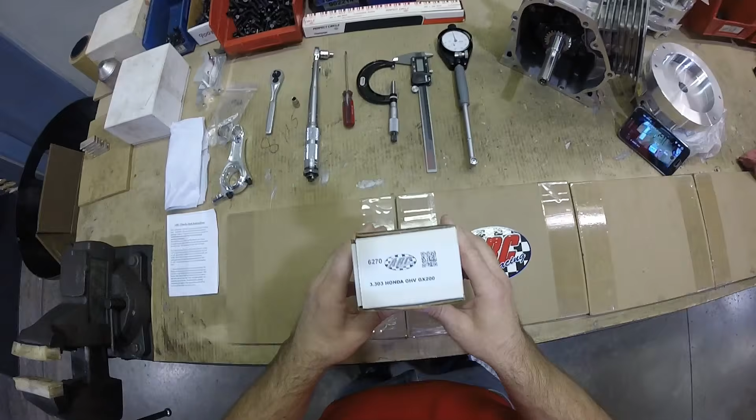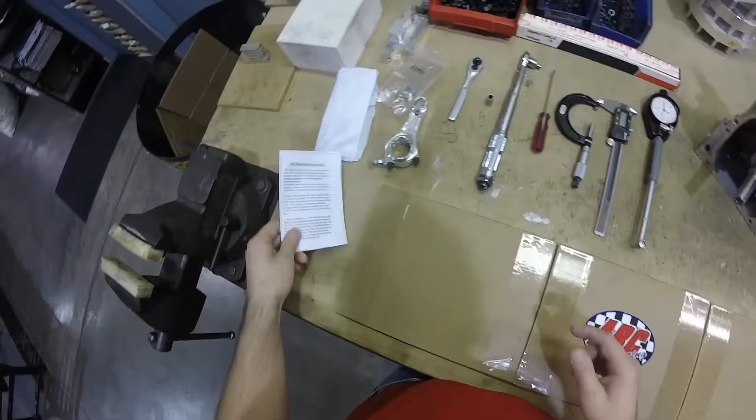When you receive your billet connecting rod, it'll come in this well labeled box telling you the length of the rod, the engine it's for, and the part number. Inside the box, of course, you'll find the bearing inserts, the connecting rod with the bolts already installed, and these instructions. Now the instructions will tell you anything and everything you need to know to properly install your billet connecting

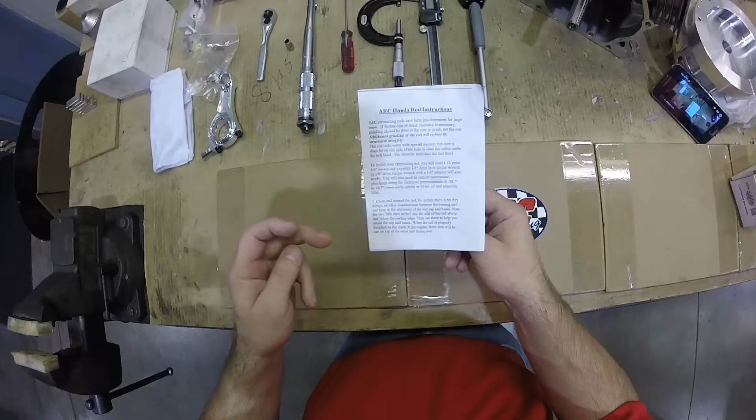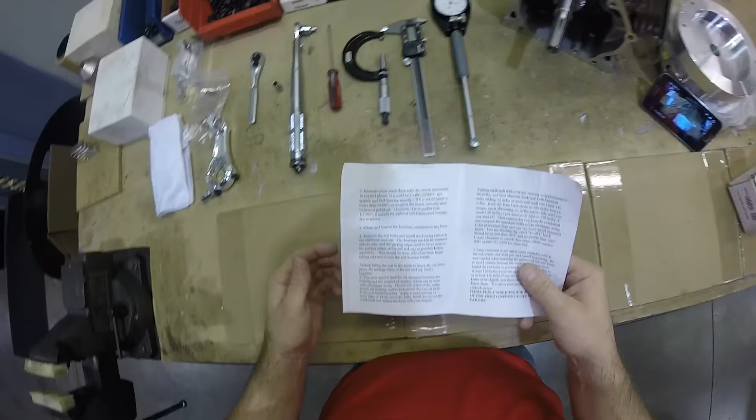rod into your engine. Everything from the tools you'll need, cleaning and inspecting the rod when you get it, installing the bearings, proper bolt torque, the poundage, the proper lube to use on them. It gives you measurements to check your oil clearances with if you're using inside and outside micrometers. It also has a brief description on how to check your oil clearances with plastigage.

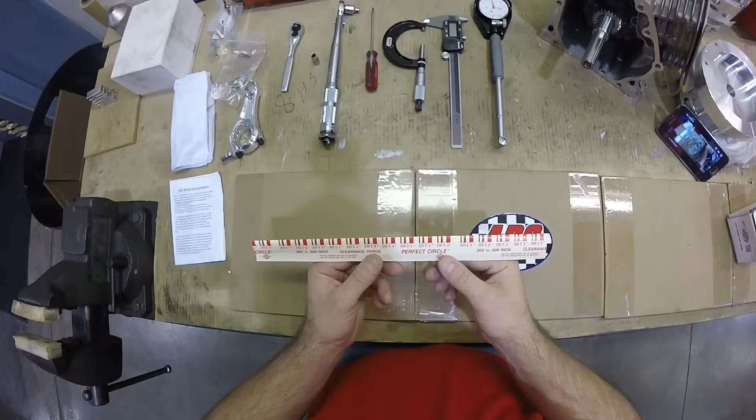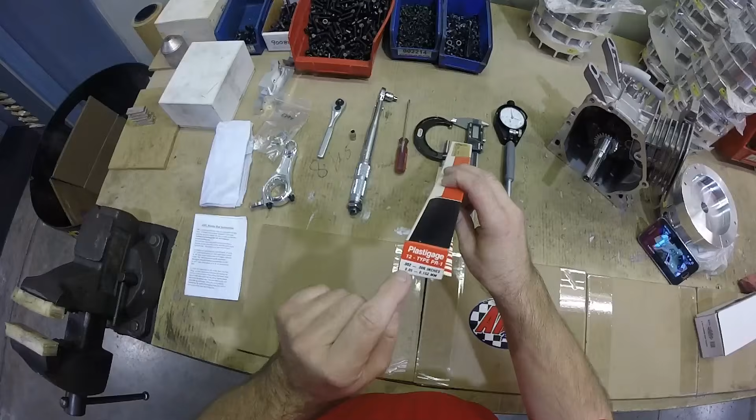Now plastigage is what a lot of people use to check clearances with. This is available at most any auto parts store. If they don't have it in stock, they can order it for you. But you need to make sure that you get the measurement sizes from at least 2 to 6 thousandths of an inch, because the measurements that you're looking to achieve here is between 2.5 and 3.5 thousandths of an inch.

The other tools you'll need that might be kind of hard to find is the 12-point quarter-inch socket that we use to tighten the bolts with. Again, these can be found at any auto parts store. I found this one at Lowe's. I got them at Home Depot. Most any place has got them or can get them.

You'll need a quarter-inch torque wrench. 3/8 is fine to use, which is what I use. You can get these little adapters at any auto parts store also, but if you use a 3/8 torque wrench, make sure that it is in inch pounds, not in foot pounds.

A 3/8 torque wrench is okay to use. The quarter-inch specific torque wrench is much more accurate, and it's also more compact to be able to get up into the engine to tighten your bolts. And you got a lot of tight areas right there, so you need something compact. But I've used this one on every engine we built, and I have zero problems tightening down bolts.

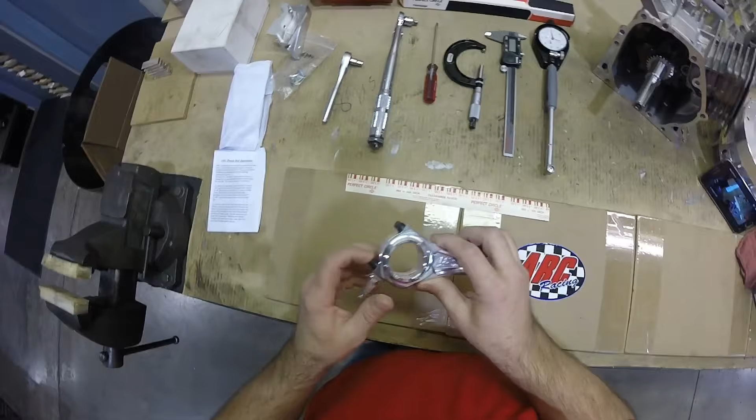Okay, what I'm going to show you now is how to install the bearings in the connecting rod and to check your oil clearance between the rod and the crank by using the plastigage. Now, as I told you earlier, these rod bolts were already installed when you got the connecting rod, and they're torqued to 150 inch-pounds. And they're done so for a reason.

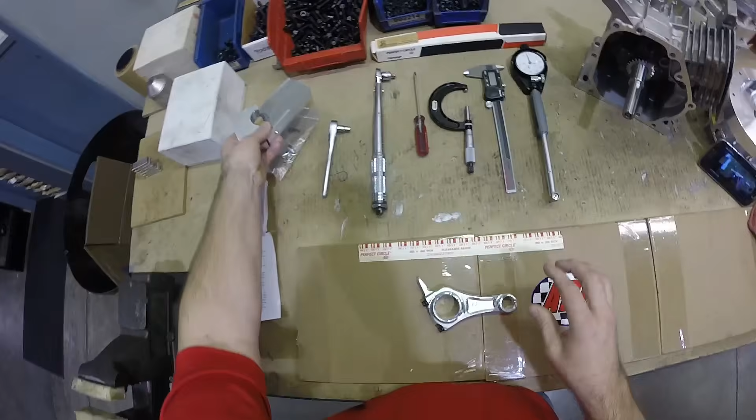It's because this connecting rod is made in two different parts. You have the cap and you have the beam. We make the caps and then we make the beams. Once the machining process is so far along on both of the products, they are mated together, the bolts are installed and torqued to 150 inch-pounds, and then they finish the machining process on the rod.

What that does is it mates this cap to this rod, meaning you cannot take the cap off of this 6270 connecting rod and install it on another 6270 connecting rod. They may look like they'll fit, they may feel like they'll fit, but more than likely what's going to happen is the bearings are not going to line up properly, and it's going to cause rod failure.

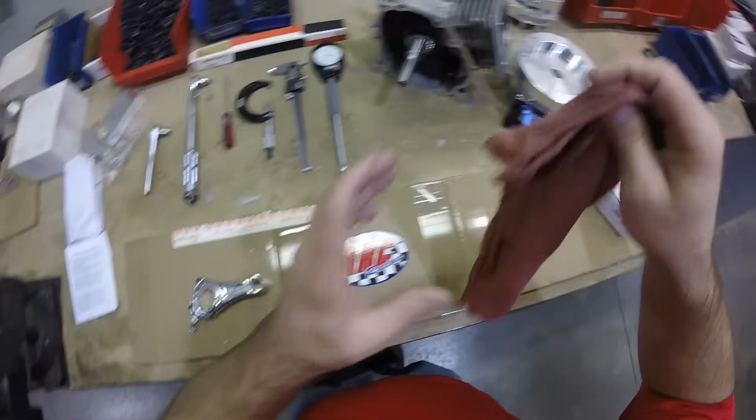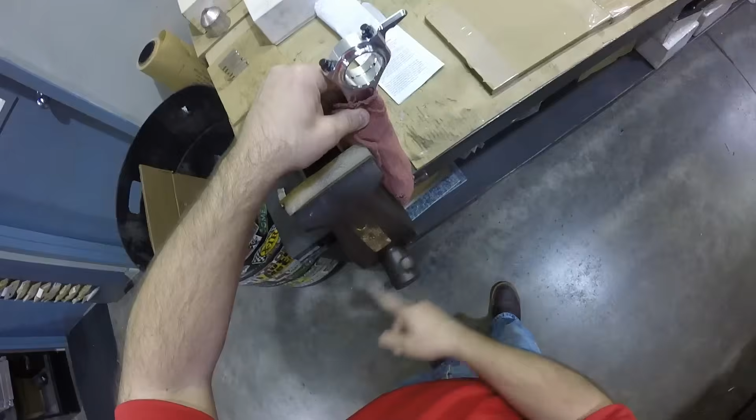Now, to take these bolts out, like I said, they're 150 inch-pounds. Easy way to do it, simple shop rag. Wrap it around the wrist pin area of the rod and install it in a vise. If you notice here, I do have soft jaws on this vise.

It is perfectly fine to use the metal jaw clamps on this rod. That's why you wrap the rag around it, to prevent any damage. I mean, you're not trying to squeeze it and change its shape. You're just trying to hold it in place to loosen the bolts. Take your 12-point quarter-inch socket and pop them loose.

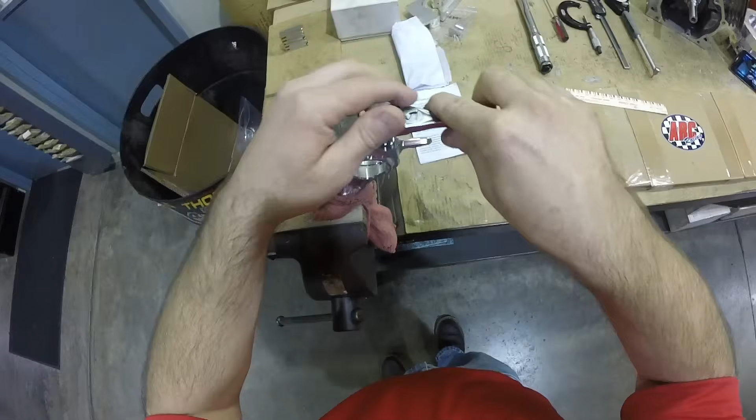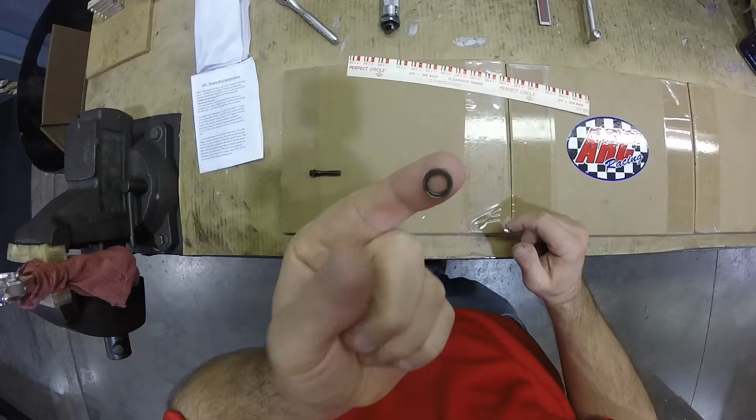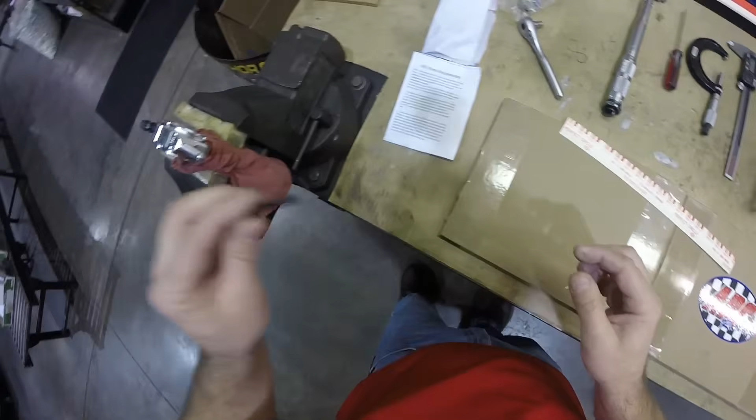Now, one thing to remember when removing these bolts is they do have a washer on them, and the washer is indexed, meaning it can only go one direction. If you look at it, one side has a bevel, the other side is flat. The beveled side always goes toward the rod bolt. The flat side always goes toward the connecting rod. That's important to remember when you go to reinstall the cap, is to make sure that the washers are the correct way.

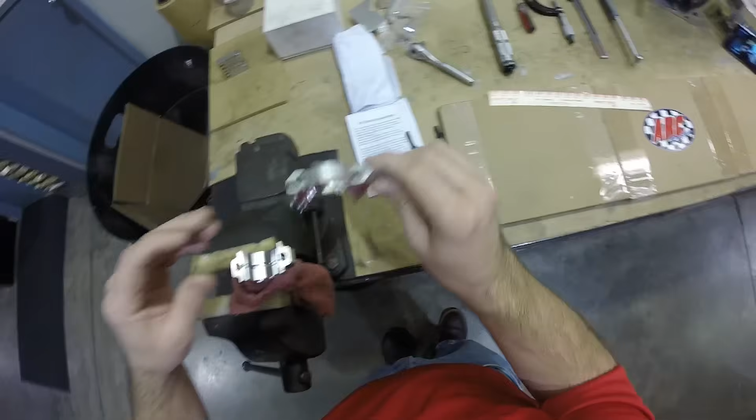Now, at this point, you can take the connecting rod and clean it. You can use warm soapy water, get down in all the holes really good, scrub it really good, and use compressed air to dry it. The compressed air will blow out any debris that may be caught up in the rod from shipping or handling, or whatever reason it may be in there.

These here are your rod bearings. Now, they're not indexed top or bottom. It doesn't matter which one goes where. One thing you may notice on these bearings, if you see right there, some of it's shiny, then it gets kind of dull. That's nothing more than the coating from where we packaged up the bearing. You see that fits a thumb perfectly right there. That's where we touch it, and it turns dark. It harms nothing. It will cause nothing. You can take a rag most of the time and kind of buff it out.

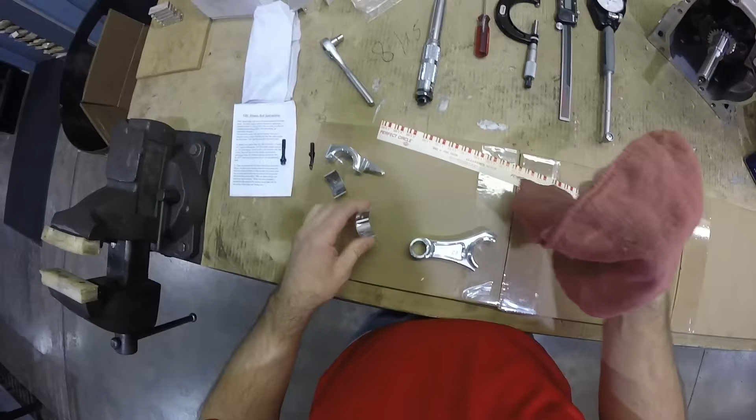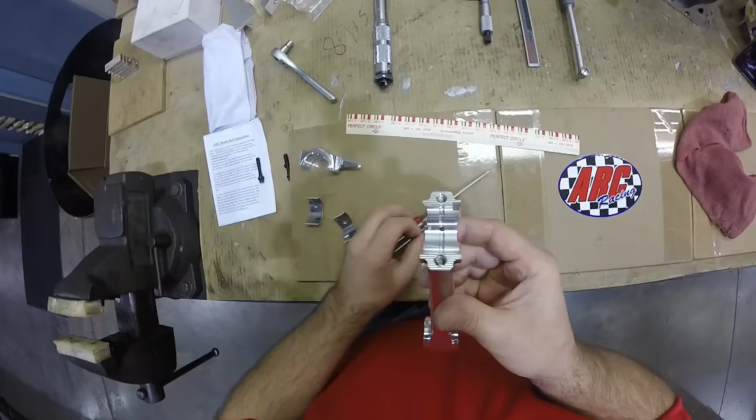Now, when installing the bearings into the rod, one thing you'll notice in the rod is this little cutout area right here. That matches the little tang on the bearing. You just simply line those two up and push it down in. And what you want to do is just try to line it up flush as you can for now. Same thing with the cap. It has the cutout and the tab. And you're just trying to get it halfway straight.

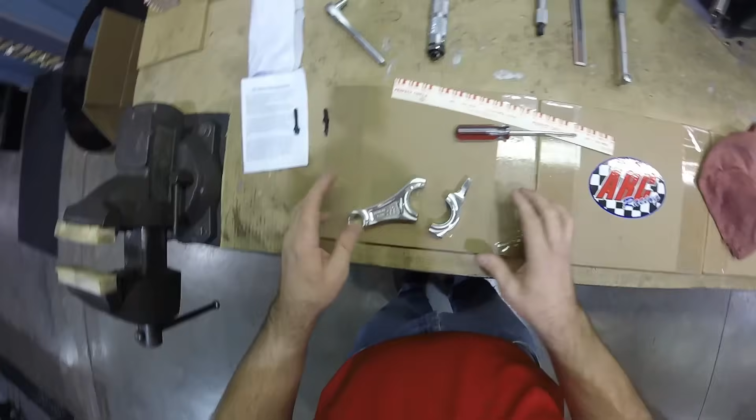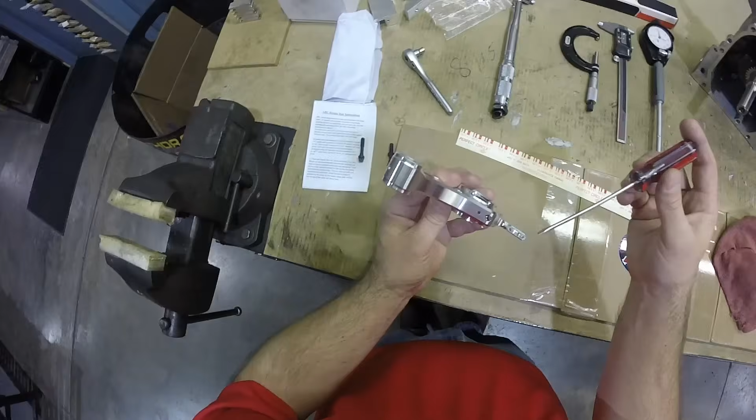Now, this is where a lot of people get confused right here on how the cap goes back on the rod. An easy way to remember that: all of the connecting rods for the Honda Clone Predator type engines will have 3 holes on one side. You'll have the original oiling hole that's the same hole as the OEM rod. You'll have the hole where the rod bolt comes through, and our forced oil dipper, which is what scoops the oil up and squirts it up into the bearing to get extra lubrication. Those 3 holes line up on the connecting rod. That's the only way this cap is designed to go on.

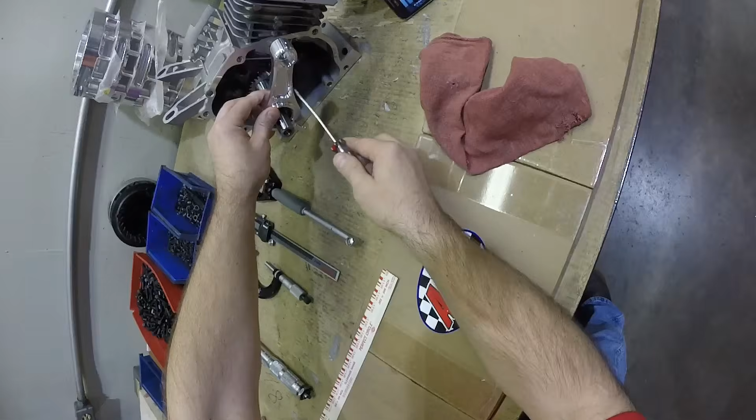There are no holes on this side. So if you only got 2 holes on one side, that means it's wrong. And that's also how you index the rod to go into the engine. You want your 3 holes to face the camshaft. That's the only way the cap can go on. That's the only way the rod can go into the engine.

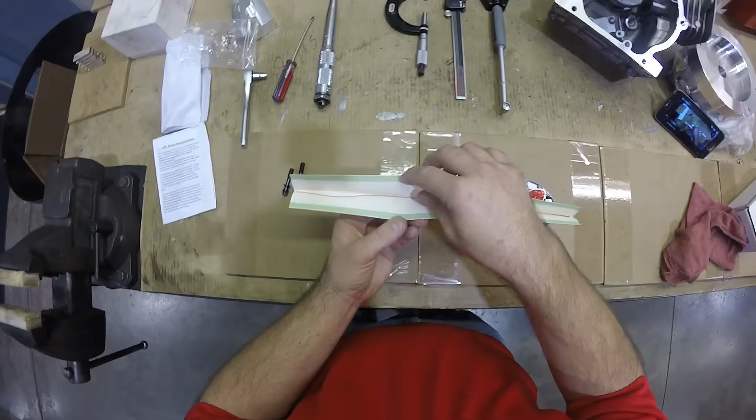Okay, now we've got our bearings installed and we're ready to check our oil clearances using our plastigage. A plastigage is exactly what it sounds like. It is a thin strip of plastic. You break off a small piece and put it between the bearing and the crankshaft, and then you torque the bolts down, and that pulls everything in together, and it actually squishes the plastigage and it spreads out like putty. And then you remove the cap and you use these little gauges here on the paper to tell you exactly how much clearance is in between the bearing and the crankshaft. This little area right here, it will be 2 thousandths, 3 thousandths, 4, 5, 6. The more it spreads, the less room is in there for oil clearances.

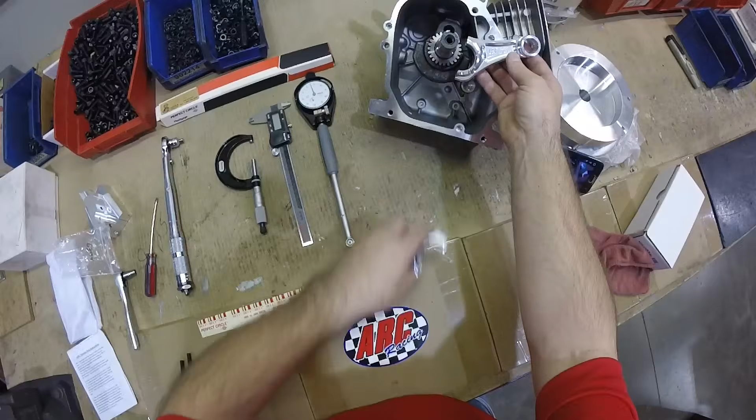So what I'm going to do is show you the right way and the wrong way to use this plastigage. A lot of people put the piston on the rod, put the rod in the engine, and try to plastigage inside the engine. Well, you don't have a lot of room in there, and this stuff is very sensitive as far as how it spreads, to get proper measurements. And when you're in here with a torque wrench trying to torque a rod down, you get crankshaft movement. I mean, that's not a lot, but that little bit right there can skew the results enough to make your measurements flawed. You'll have too much or too little clearance, and you'll think it's right because the measurements on here may say it's right, but you may have too much or too little because of all the movement you have in here. Now what I do, I measure everything outside of the engine.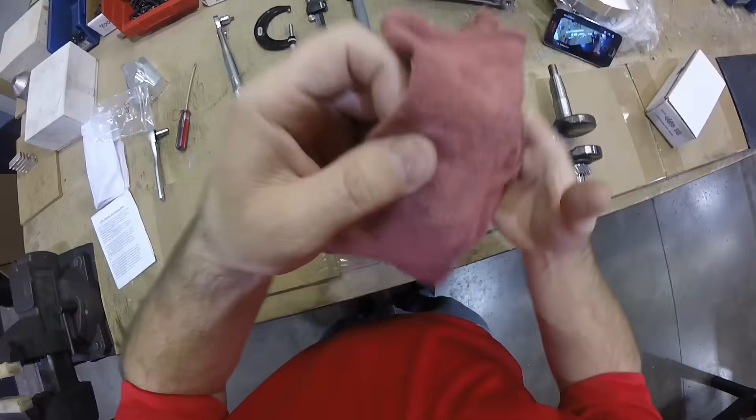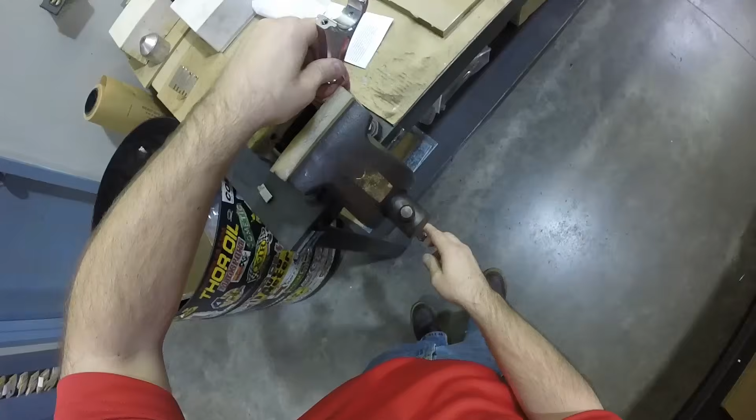Once again, take your trusty old shop rag, wrap her up, and you want to try to wrap it as low as possible because we're going to put it in the vise with the rod angling out so that it supports the crankshaft.

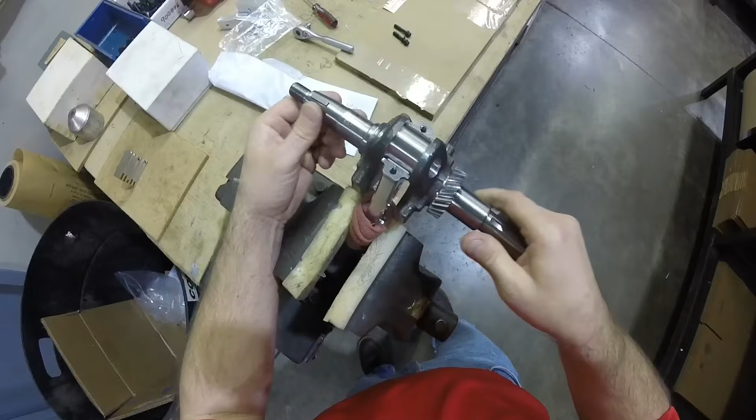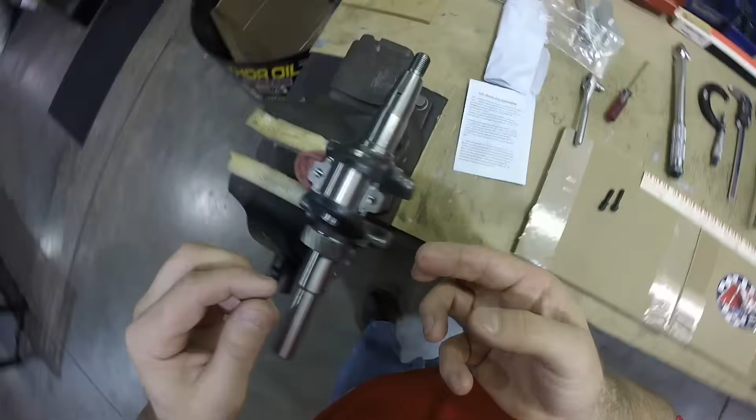You don't want the crankshaft touching anything. Alright, and then you simply take a piece of your Plastigage. I've got a piece right here already out. You don't need a lot, you just need a little bit. That right there is enough. Some people tell you to lay it crossways, some people say horizontal. I don't really care, just put it up there so that it don't fall off.

Take your rod cap, the bearings are already in it. Make sure that we line the cap up right. Remember your 3 holes. Place the cap on it. Then you're going to install your bolts. Make sure your washers are turned the right way, bevel to the bolt. I've already pre-lubed these bolts with just some standard motor oil.

You always need to lube your bolts every time you torque them. That helps the bolt grip like it needs to and stretch like it needs to. That's what holds the bolt tight, is the stretch. You do not need Loctite or any other type of adhesive on these bolts. If they're lubed properly and torqued properly, they will stay tight. The stretch of the bolt acts like a spring, and it keeps it tight.

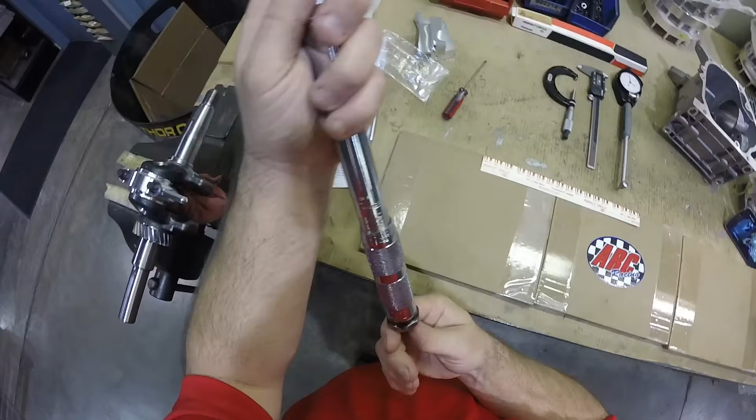Okay, everything's lined up good. 12-point 1/4 inch. If you look at the instructions, it tells you how to torque the bolts and in what alternates. You want to start around 60 inch-pounds. Set our torque wrench at 60, and you'll want to run the bolts down a little at a time till you feel them snug up, alternating back and forth. Got the first click, second. Alright, and you go up in 20-pound increments.

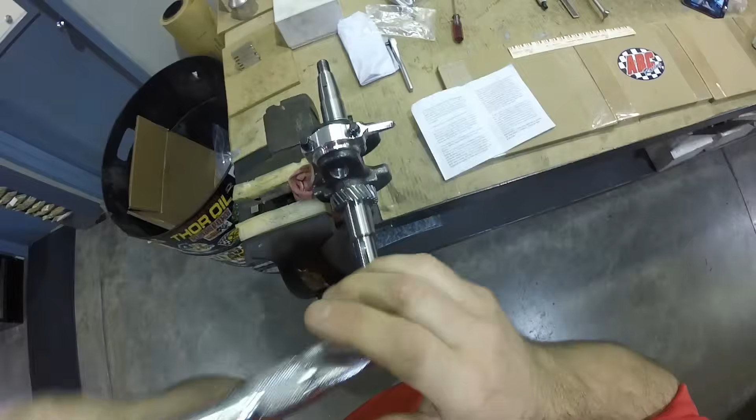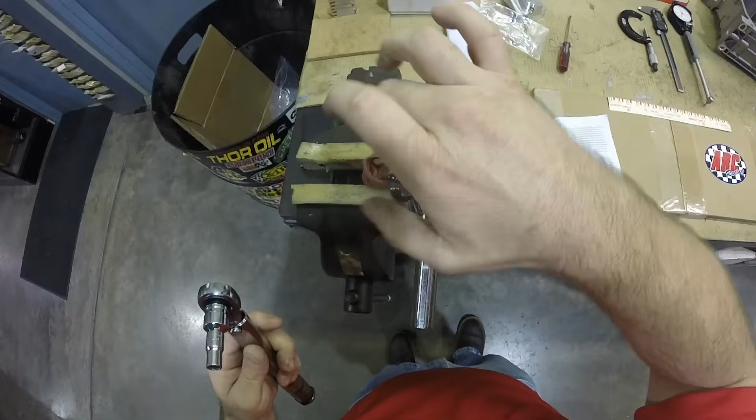Now you're seeing the rod move a little bit, but the rod itself is not flexing. That is just it moving inside the towel there. That's all that is. Alright, go to 100. Oh, too far. Okay, now we'll go to 120. And you want to go all the way to 150 inch-pounds in 20-pound increments.

And once you get to 150, which I went ahead and went to 150 for time restraints. I don't get paid by the hour to do this like I do other things. I'm on my time right now.

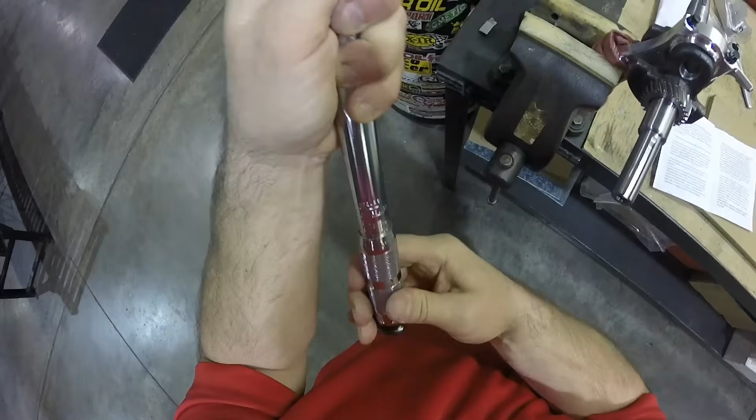Okay, we're at 150 inch-pounds, and you want to back the bolts back off. I've always been told never use a torque wrench in reverse. They're only made to torque in one direction. So just get you a small ratchet and loosen them up a little bit. You ain't got to go too far with it, just loosen them up. Now I usually start back at 100 pounds after I loosen it up. Once again, just ease them down.

Alright, now we go to 120. I'm going to go to 140. It ain't necessary that you got to go exactly 20. You can go 25, you can go 30, just as long as you go up in equal increments. Now I'm going to go to 170.

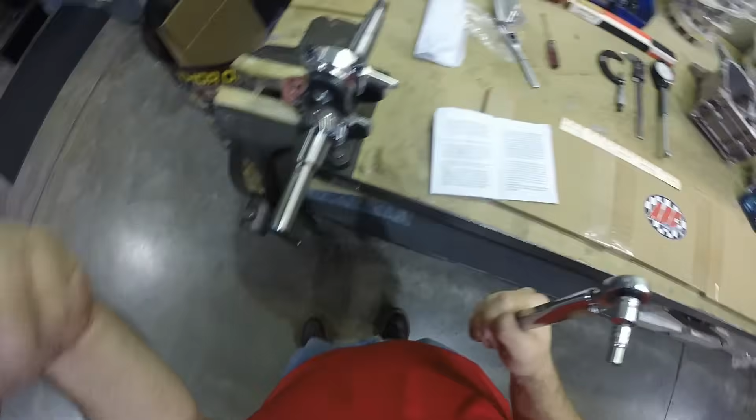Little at a time. What you're feeling now, a lot of people freak out at this point because they think the bolts are really stretching because it hasn't clicked. What's happening now is the bearing is actually seating in the rod. I always hit them twice. Okay. Like I say, the last few pounds of the torque, it feels like something's fixing to break, or something's stretching or moving. Well, that's exactly what's happening. The bolt itself is stretching. That's what's locking the bolt down.

The bearings are seating into the rod because the bearings themselves are actually a little bit bigger than the inside of the rod. They're shaped a little different, so you have to get them to proper torque specs to crush them down so that they contour to the shape of the rod. Everything seats in good, the bolts stretch and become big springs, and that's what holds them tight. After you get everything tight, let it sit there for a second or two, not too long, and remove your bolts.

What this does is the Plastigage is in there, and it's squishing it in between the bearing and the crank and spreading it out like putty. Now I will warn you that this Plastigage I'm using is about 10 years old. This is the first time I've Plastigaged in probably 10 years. I use inside and outside micrometers, so this stuff may look a little funnier than it's supposed to. Watch our washer there. Be very careful taking everything apart. You don't want any side to side movement.

Alright, you see what the Plastigage done? It looks like putty. It's spread out. It crushed in between the bearing and the crank like it's supposed to. Now you take your gauges here and you look at how much it spread. Okay, we're a little wider than 3, not quite 2. So I say we're right around 2.5, right where we need to be. Now, this is not an exact way to do it. This is just a way people can set their oil clearances that do not have these expensive tools. And what I'm going to do now is show you how to measure with the inside and outside micrometers.

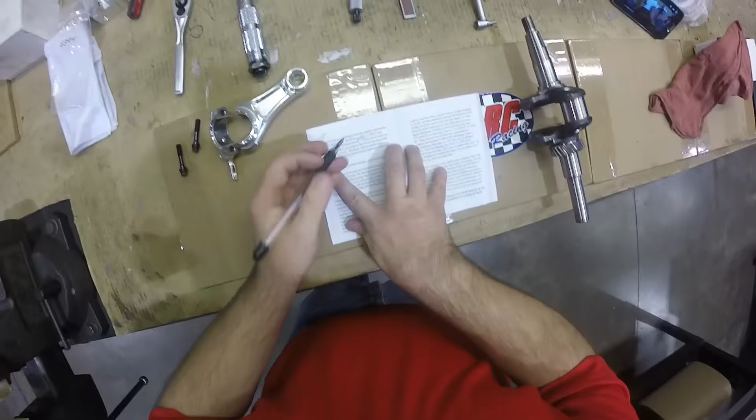Okay, now I'm going to give you a quick rundown on how to check your oil clearance using inside and outside micrometers. The first thing you need to do is find your instruction sheet. Open it up to section 2, and there you'll find what the crankshaft journal should measure. This is the crank journal. This is the part you're measuring. This is where the rod rides.

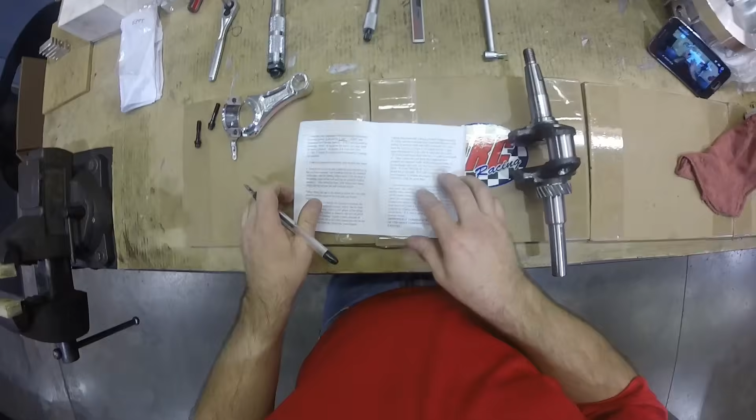And this is for a Honda clone. All the instructions will have the proper crank measurements right here that you need. And for the Honda clone, it's 1 inch 180 thousandths, plus or minus a half a thousandth. You need to make sure that the crank is good and clean. And today I'm using a 1 to 2 inch micrometer.

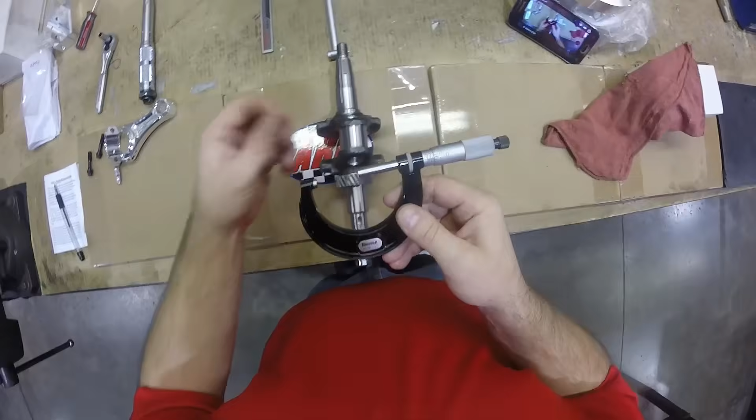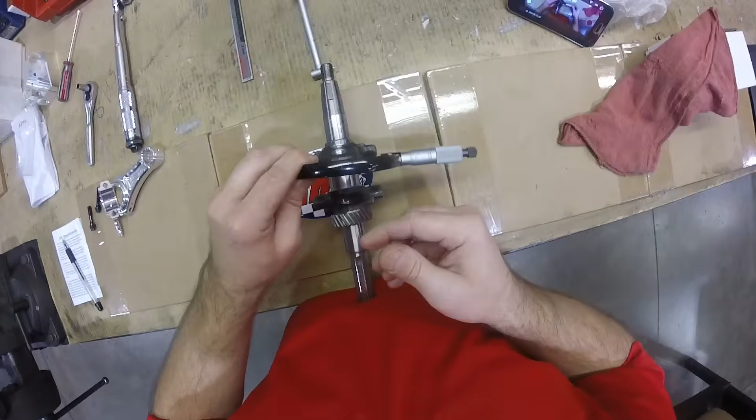Now the only areas you need to worry about measuring on this is top to bottom and side to side. If those measurements are good, then the crank is good. Take your time doing this. Don't want to get in a hurry and mess up. Alright, that is about 1/10 over where it needs to be. Just over 1 inch 180 thousandths, which is normal.

I see these cranks a little on the big side more than I do the small side, which is good because you're able to polish the shaft and get your clearance exactly where you want it. And that side is also about 1/10 over 1 inch, 180 thousandths. And that means the crankshaft's good and round. It's a little on the big side, but according to our Plastigage we did earlier, it showed about 2.5 thousandths clearance, which is right where you need to be.

Now we're going to measure the inside of a rod. The bearings have already been installed, and we're going to have to put the bolts back in them and torque it back down to 170 inch-pounds. Always make sure the washers are turned the correct way. Now these bolts again have already been pre-lubed.

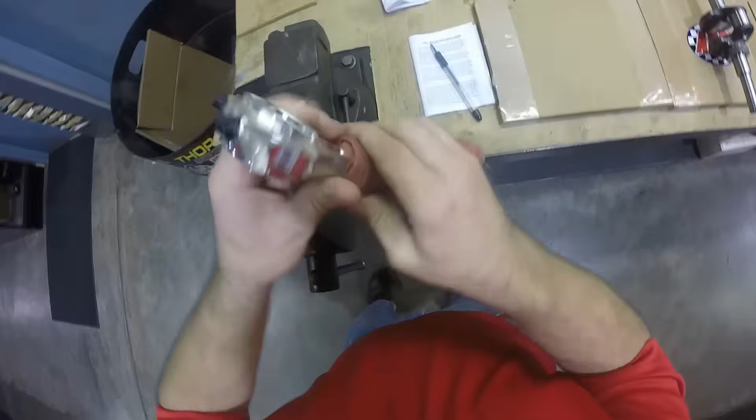We get our trusty shop rag here, roll it back up, put it back in the vise so that we can torque it back down to our 170 inch-pounds. Now since these bearings are already installed and have been seated, we don't really have to go back through the torque routine we did at first from 100 to 150 and then back it down. You can start it right around 100 pounds since the bearings are already seated, and go to 170 through increments. We're going to start at 100.

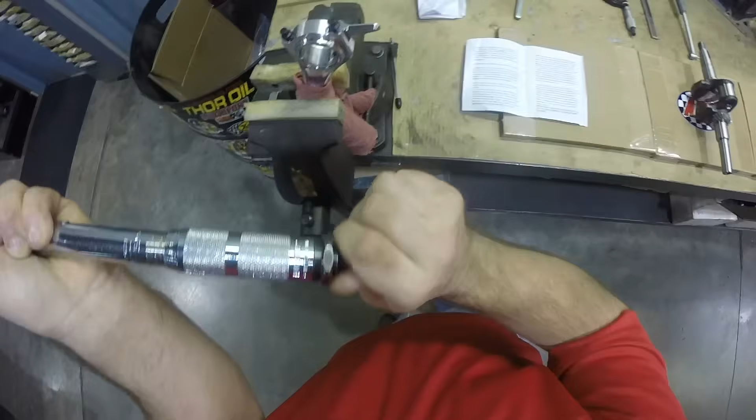Got to have the socket on there first, Jody. Get in the game, brother.

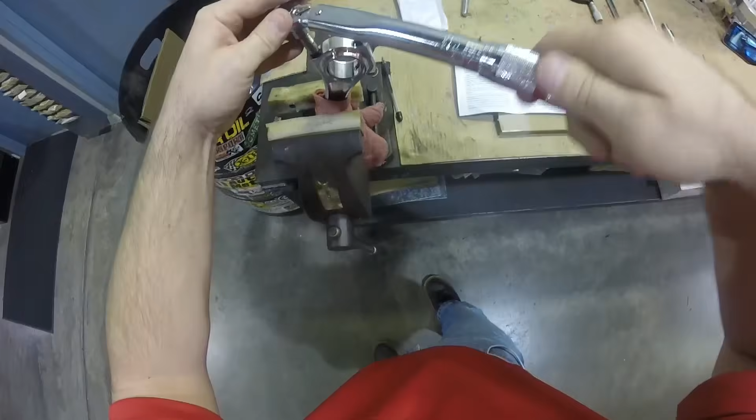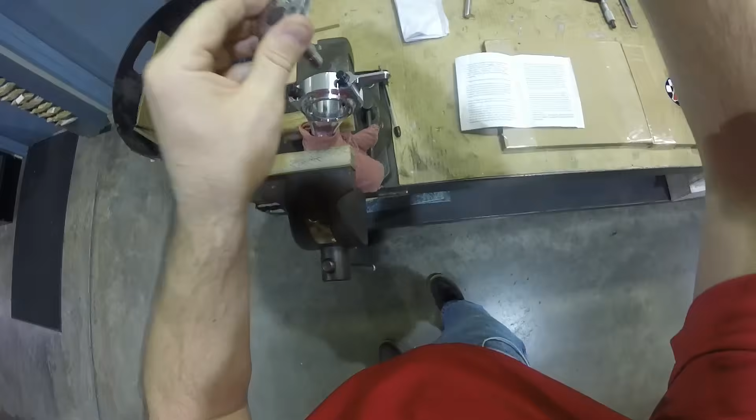Alright, that's 100. I'm going to go to 120. Now this thing should tighten right on down. You shouldn't feel as much of the stretching and seating as you did before. That usually only happens one time. Once the bearing is seated in the rod, everything should tighten right down like it should. Okay, now we're going to 170. Yeah, see how quick that happened? Went right down like it should. I always double tap.

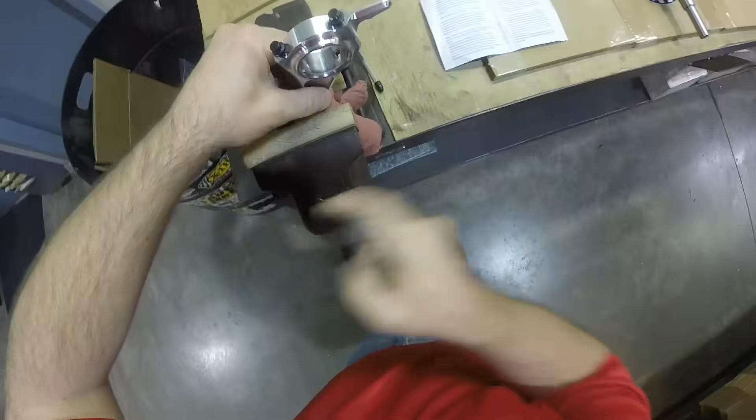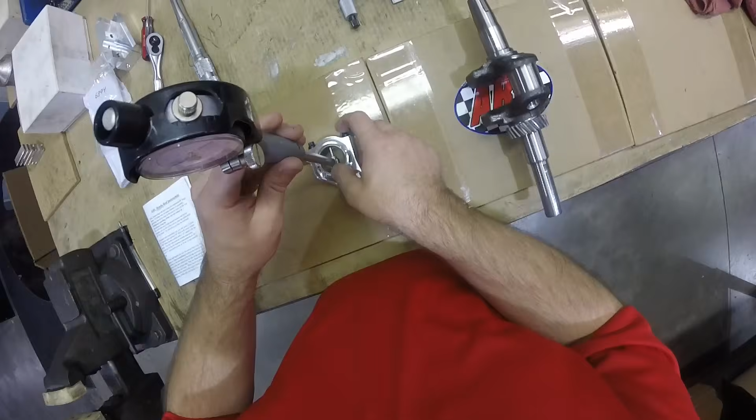Okay, now take our rod and we're going to use our dial bore gauge here to measure the inside of the rod. And this dial bore gauge is zeroed out at 1 inch, 180 thousandths. And one thing you want to make sure of when using the dial bore gauge is that you stay away from the oiling holes in the rod. They'll give you some really funky measurements. Alright, so what we do is we just run it down the rod. Get everything where it needs to be.

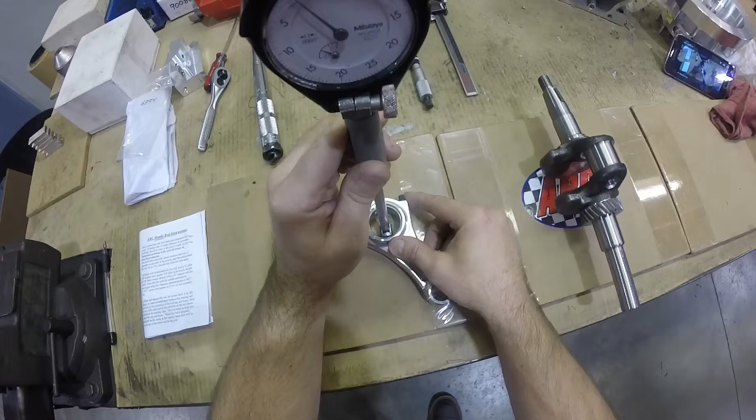And that's showing 2 thousandths bigger. So we zeroed out on 1 inch, 180, and we're showing 2 thousandths bigger, which is 1 inch, 182 thousandths. Meaning that this connecting rod has 2 thousandths oil clearance on it right now. So you see a little bit of variance between the Plastigage and the actual micrometers. This is why I like using micrometers. They're a lot more accurate.

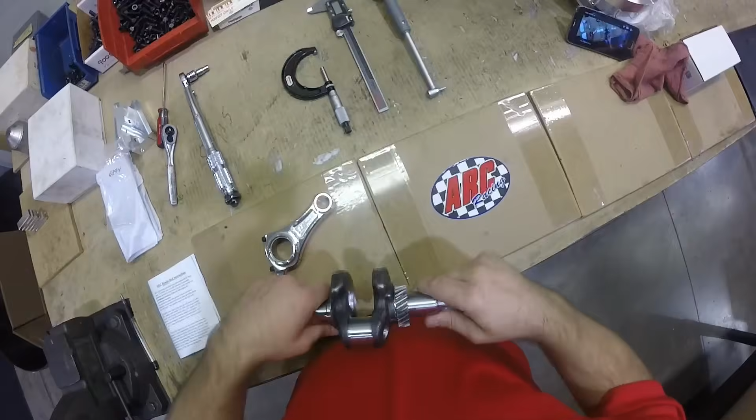Now I know that I'm about 1/2 thousandth tight on my clearances, so I can take the crankshaft in there, put it in the crankshaft polisher, and polish it about 1/2 thousandth. And you don't necessarily have to have a crank polisher to polish a shaft. I mean, for years and years before I came to this wonderful company, I would stick them in a vise and take my emery cloth and run around it, making sure that I'm catching all the sides good.

I go really slow. I'd hit it with the rough side. I'd take a measurement and see where I'm at, and then I would flip it over to the smooth side and smooth it out. So you don't need all these fancy tools to build fancy engines. You just got to be creative sometimes. So that's kind of in a nutshell how we find our clearances with connecting rods.